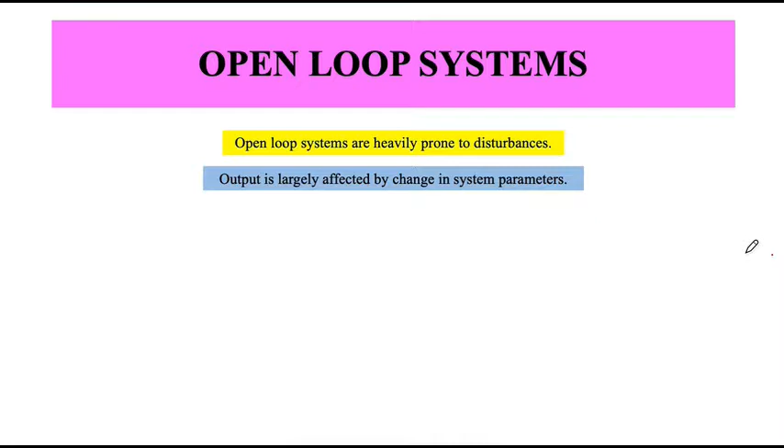Open loop systems are heavily prone to disturbances, right? So the output is affected by change in parameters. System parameters could be like, talking about a mechanical system, a mass could change, or any other thing in the system could change. It could also change because of external environmental conditions like temperature, sometimes disturbances act into the system, and I wouldn't know how to bring my system back to its original state.

For example, if I'm driving a car and my pedal is at a constant position, if I hit a ramp or an upslope, that is a disturbance, right? If I keep the same pedal position as I go through the ramp, I will not be able to maintain the desired speed, and after a while I might even lose speed and go to zero speed. So there is no automatic correction if I set my pedal to its open loop value and just don't change it when the disturbance comes.

So this is a block diagram for an open loop control system, where my disturbances affect my output.

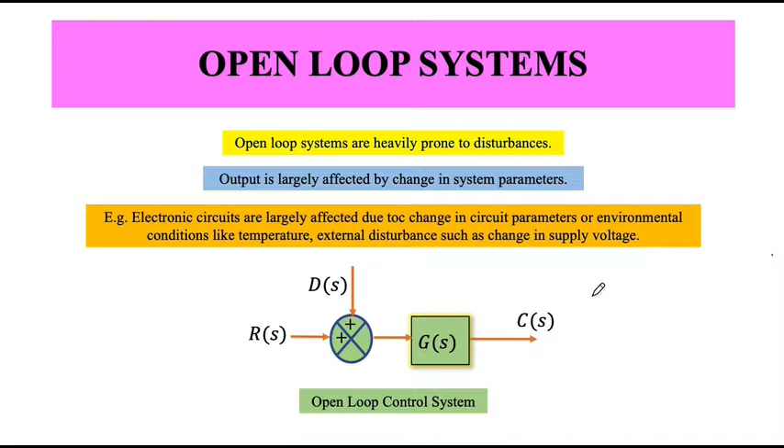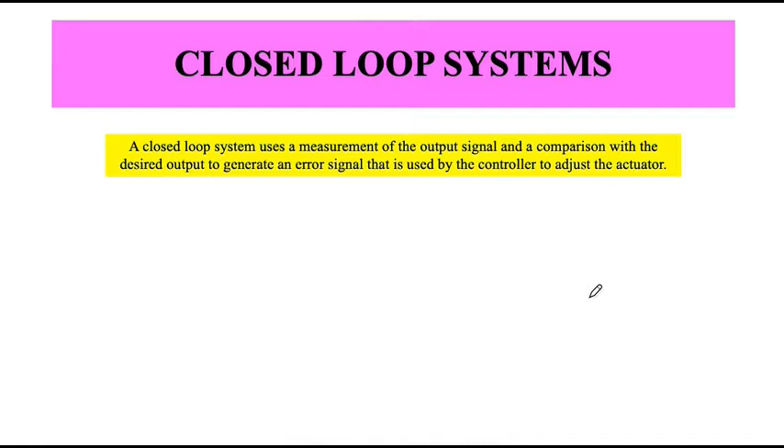In a closed loop system, the output is actually measured and compared with the reference signal, which generates an error signal. I update my control law, and through the control law I adjust my actuator, which gives the actual control input to the system.

So typical things that could happen are: you have the effect of disturbance, you also have measurement noise. My measuring device may not be very accurate, and it might come in a bit noisy. So how do we deal with these things, the disturbance signals and the measurement noise? We want to design our controller such that I reject disturbances, and I also reject the measurement noise.

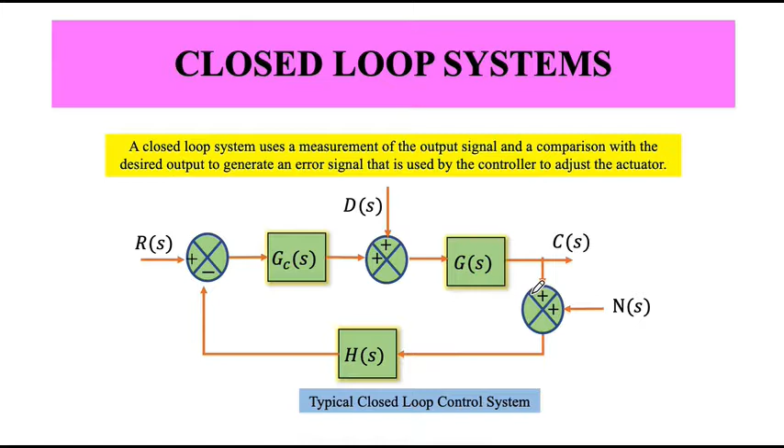Let's start with an example. This is a model for automatic control of speed for an automobile on a straight run. So I have a reference input, reference speed, and measured speed, and these generate an error signal which will decide the position of my throttle.

And this is my throttle, and there could be disturbances in terms of road slope, which could either be a positive slope or a negative slope. No disturbance just means no slope. This is a very simple model of my car. The car, which looks very big with lots of components, actually looks very small here. It's just a first order differential equation, a system with just one pole, and I get the desired speed. This is like a standard measuring device, like a tachometer, and it will convert into an appropriate speed.

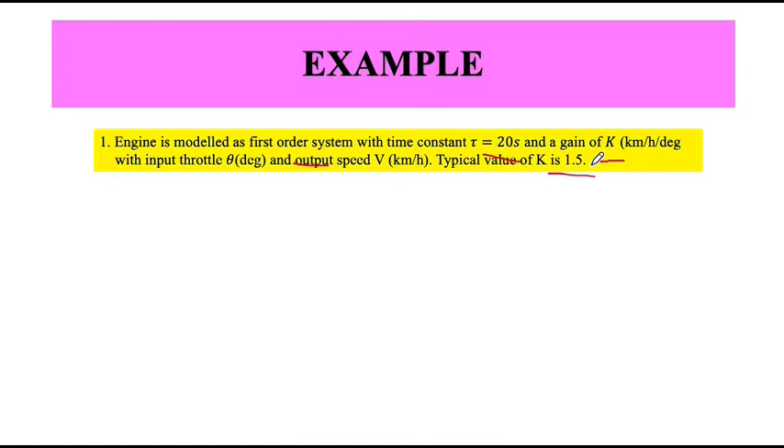The engine, for simplicity, is modeled as a first order system with time constant of 20 seconds and gain of k, which typically has a value of 1.5 here. The input is throttle angle measured in degrees, and the output is desired speed. The speed feedback is obtained by the tachometer, somewhere in the feedback loop, as we have seen in the diagram.

This is used to obtain the error signal for changing the throttle angle for the desired purpose. We say that the throttle angle has a time constant much less than the system time constant, and therefore we could ignore it. It's just modeled as a small gain of k1. So the error times k1 gives me the control input, and a typical value we could assume in this case is 50. Just see the diagram for that, it gives me the control input.

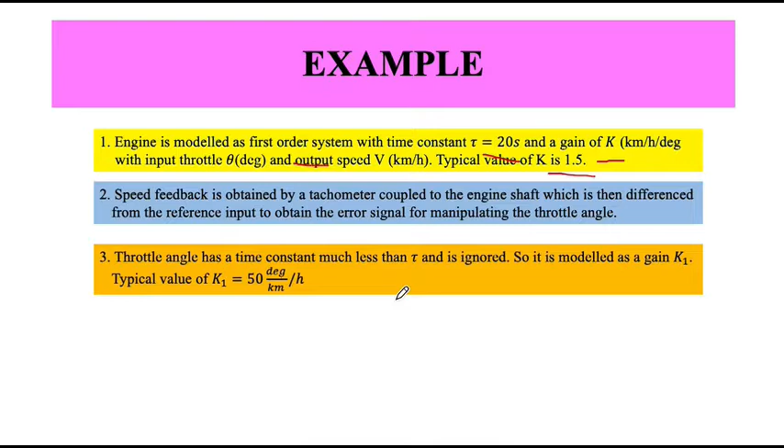The disturbance signal appears as the automobile runs up or down a slope. It is expressed in terms of percentage of road slope, and a 90 degree slope could actually mean you're hitting a wall, going vertically upward or downward. So this signal is converted into an equivalent throttle angle, and then you have this kg which takes care of the units, measured in degrees percentage per unit percentage of the slope.

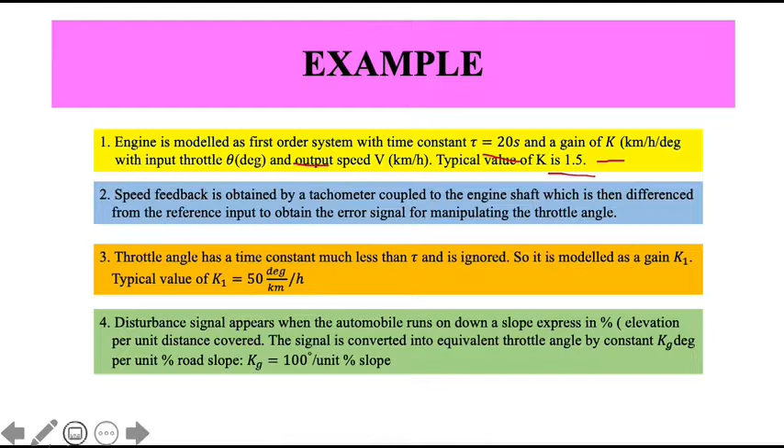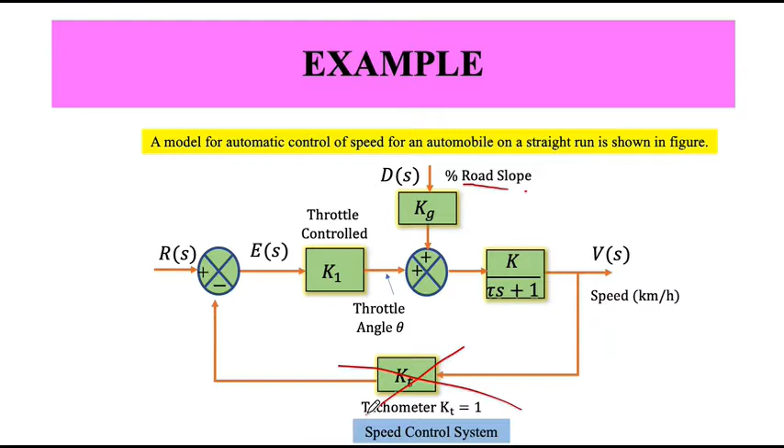So why are we doing this? Let's see in the diagram. What happens if we just do not measure this? We have a reference and an output, right? Suppose there is no feedback, and also take the case of feedback. What will happen in both cases, open loop as well as closed loop system? Let's see that.

Given the first condition of the problem, let the desired speed be 60 km per hour. That is vs is 60 km, or you can say vt from my diagram. Then we have to find r, the reference signal, with the system being first open loop and then closed loop. We will also see how the steady state error for step input changes.

So let's say in open loop system, at steady state my speed is 60. This is my open loop transfer function, this is input, this is my output. In open loop, steady state speed is 60, and my transfer function looks like this: k1 k over tau s plus 1, and rs. This will be my step signal.

So I have to determine the size of the step here. Let me just call it r by s. I am representing it with r by s because I have to find out the step signal. I will do the final value theorem, and then I get 60 equals k1 k r. As we have seen in the last slide, k1 is 50, k is 1.5. By putting in the values I can get the value of r, and r is 0.8 km per hour.

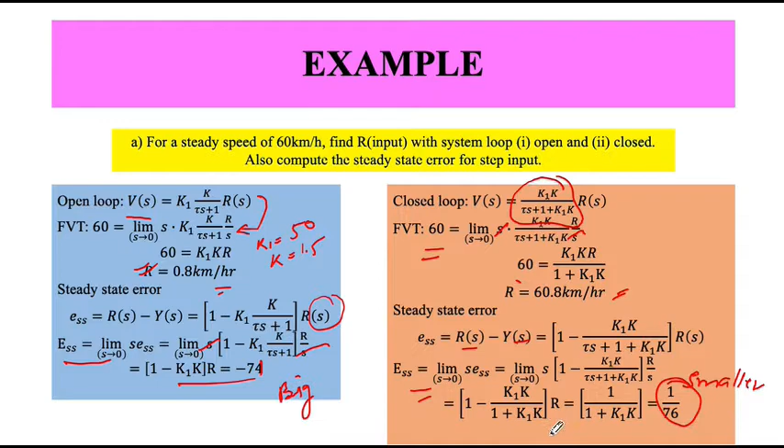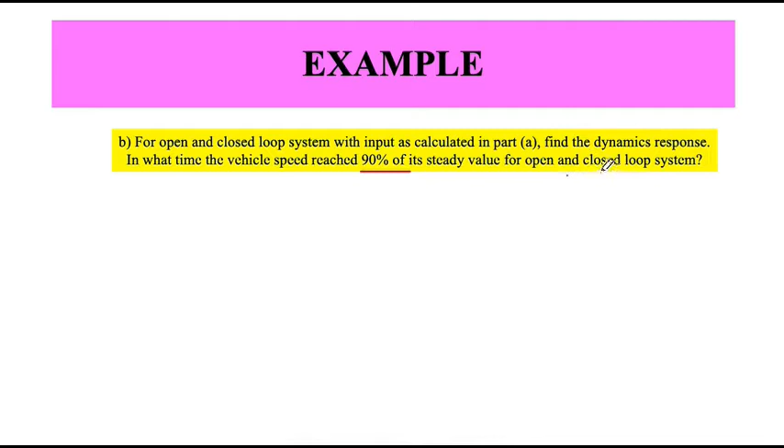Now in the next case, let's do some transient analysis. Earlier we did the steady state analysis. Now we want to find out at what time the vehicle reaches 90% of its steady state value for open as well as closed loop system. Let's do first for the open loop case.

In the time domain I can write directly vt equals 60 times 1 minus e to the power minus t1 by 20, considering time as t1. This is straightforward to write. Now my output is 90% of the steady state value, which is 60. So I want to find the time, let me call it t1, at which this occurs. I have an equation here with one unknown. I can easily compute t1 to be 46 seconds.

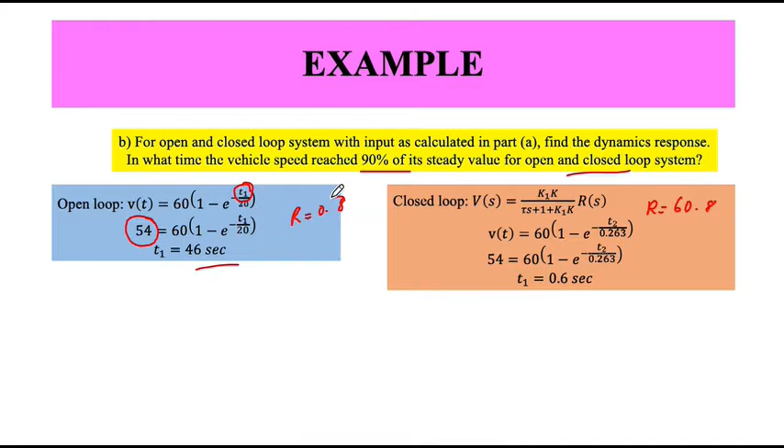So in case of rs for closed loop, it comes from what I computed earlier. It was r equals 60.8, and over here r was 0.8 kilometers per hour. So just be careful with that.

Now let me write down the final expression. Vt equals to, I'll skip the bulk of the computation. What I have is 60 times 1 minus e to the power minus t2 by 0.263. I just substitute these values and compute the inverse Laplace transform, and by now you know how to do these things. So about 90% could be 54, and then I compute the value of t2.

It actually turned out to be just 0.6 seconds. So this is open loop, this is closed loop, and you've seen it's about 77 times faster, right? So with a closed loop, my steady state error is much smaller, and also my response is pretty fast.

This will motivate us towards analyzing the effects of feedback on the system. So first we saw it happen in steady state response, and it also happens in transient. So is there anything else associated with feedback?

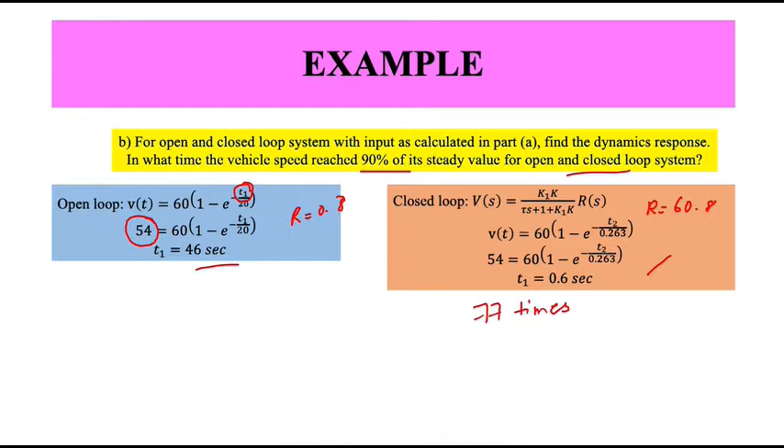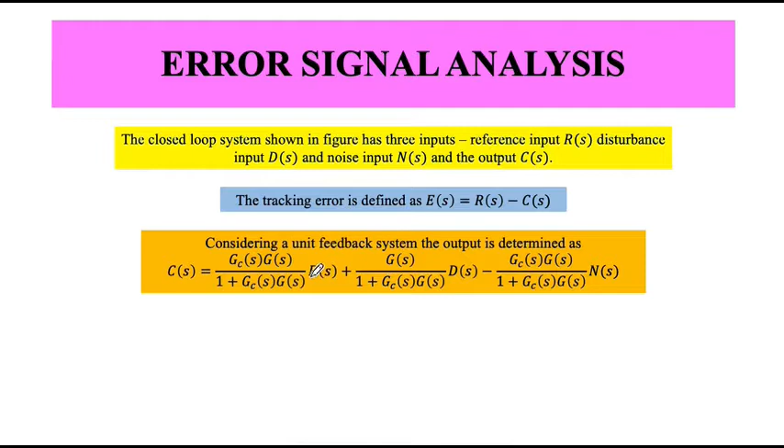In the initial block diagram, we mentioned a few other things in addition to reference and output: one was disturbance input and the other was noise input. In the presence of disturbance and noise, I can compute the overall output of the system as a sum of responses. First, compute the response by setting RS and considering DS and NS equal to 0. Then compute the response to disturbance by setting RS and NS equal to 0. Lastly, for noise, set the remaining two inputs to 0, and use superposition. So this gives the total response to the reference signal, to the disturbance, and to the noise.

Let us define the loop gain. Loop gain is GC into G. If you remember from the diagram, my forward loop was GC into G, where this is the controller and this is my plant. Now for the error, of course it's a function of the reference, the controller transfer function, and the plant transfer function.

Similarly for disturbance and noise, I can compute directly, and these are things we will discuss - how to compute the effect of disturbance in numericals - and then take the total response of the system as the sum of responses to the disturbances combined with the response to input.

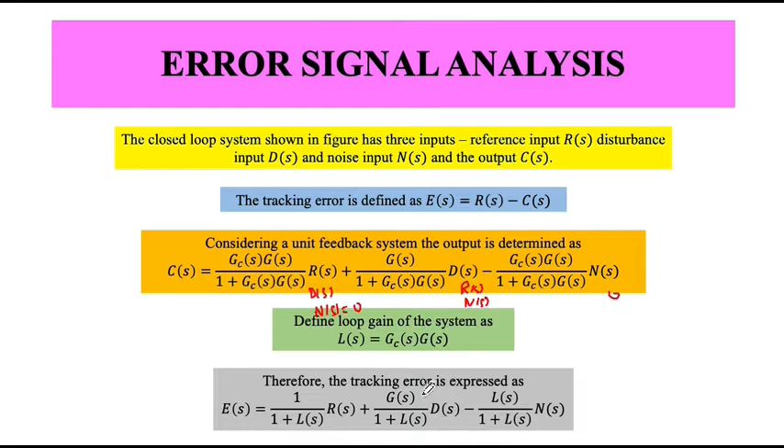Just superposition. So when we started the lecture, we said there could be some parameter variation, right? And then we'll see what is the effect of parameter variation on the system. So assume there is no disturbance or noise - we will come to this very shortly.

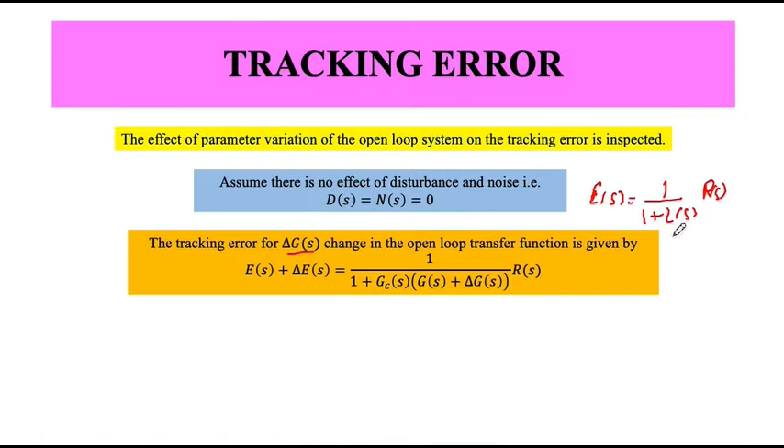Say my transfer function of the plant changes from G to G plus delta GS, and then the error signal changes accordingly. So ES, as I know, is 1 over 1 plus LS, times RS. And L is equal to GC and G, and G I now make GS plus delta GS. So this is how my error will look, by putting all these into this equation.

Now the change in tracking error can be computed. You just say what is delta ES - take this term ES, move it to the other side, and put in the values. ES is 1 over 1 plus LS, times RS. Then you get this expression, right?

This says if delta G is 0, then this term goes off. This is also what I have here - delta GS is the term, so that's the vital case to check. The change in tracking error is something like GCS, delta GS, and you have lots of terms of delta GS influencing the particular number.

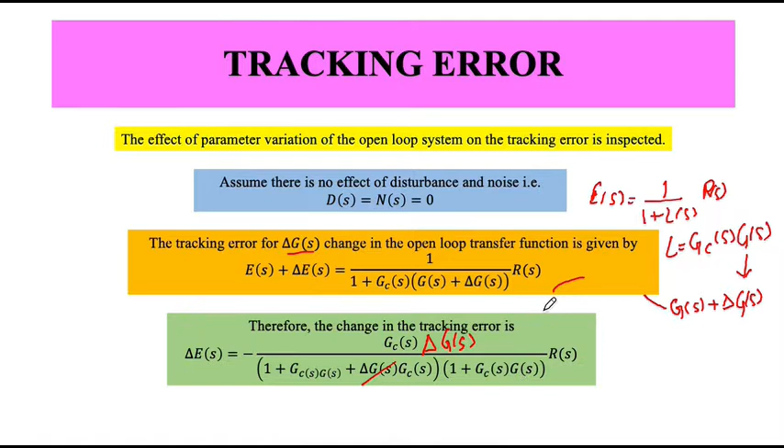So if I just take an open loop - if you remember, for convenience, let me draw it here - I'm having GC, I'm having G, then my output is CS, my input is RS. Now the error is usually, error will be RS minus CS, and in this case this is R.

So I will just omit the S for a moment. So C is GC GR, okay, and this is R minus, so E plus delta E equals R times 1 minus GC G plus delta G, okay. So delta E, since this is again an open loop, delta E equals minus GC delta GS. I'm just putting this E and then bringing it here. When you compute, you will get this value. So this is again an open loop.

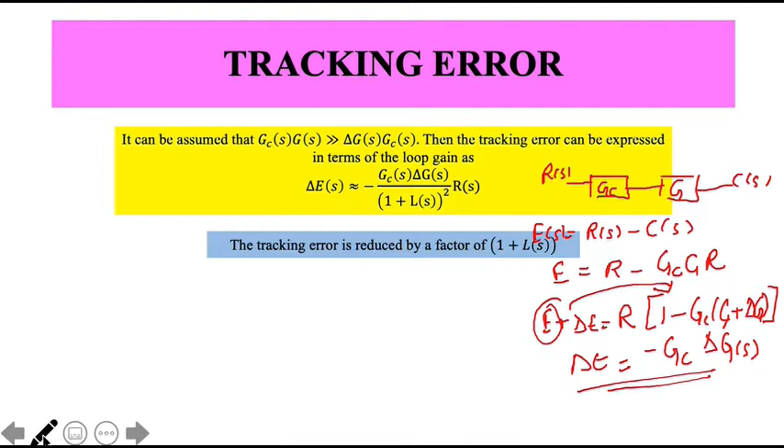Let us compare what will happen in closed loop. We derived this for closed loop in the last slide. I have an error signal, of course. So I do some approximation that GC into G is much larger than the very small change, and I can get an approximate expression like that. So this is change in error, delta E equals GCS delta G by 1 plus LS squared, RS. So if you compare this, you see that the tracking error is reduced by a factor of 1 plus LS. I will just erase the pen, okay. So my tracking error is reduced by 1 plus LS squared.

Or the square, and for large value of L I can just ignore this one, and just write LS. So delta E equals minus GC delta G. One is LS, another is also LS, and LS is GC into G, and it will get cancelled, and I will get this expression over here, okay.

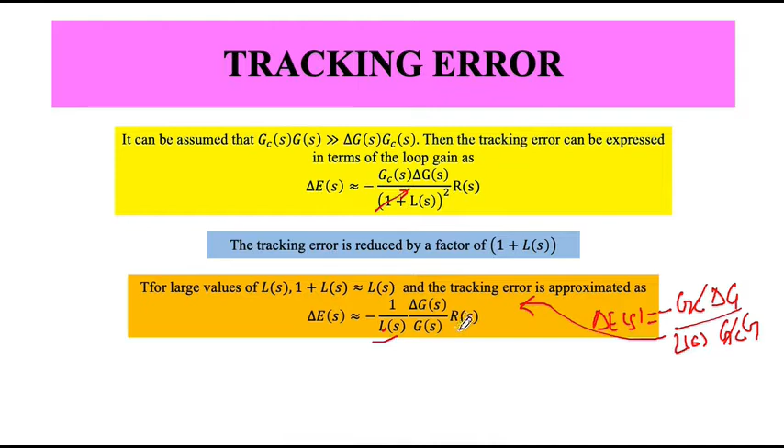So this is not difficult to obtain, right? So what does this mean? That the larger value of LS results in smaller change in tracking error, okay. Is there something which I could change in LS? Well, LS is, if you just recall, GC G. So there could be, well, you could now change the plant, but I really don't want to do that, right? Because the plant is already given to me. There is something which I am giving to control, and I just can't change the subject or the plant. So I can just manipulate my GC in such a way that it results in smaller change in tracking error. So this is about how feedback changes the error, or how it helps in reduction in error.

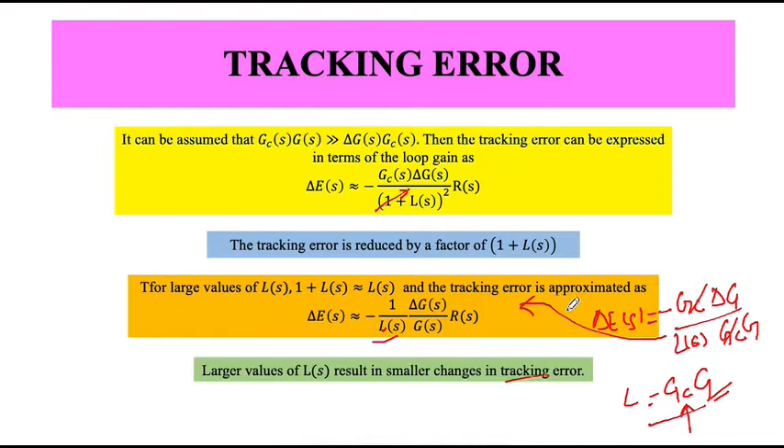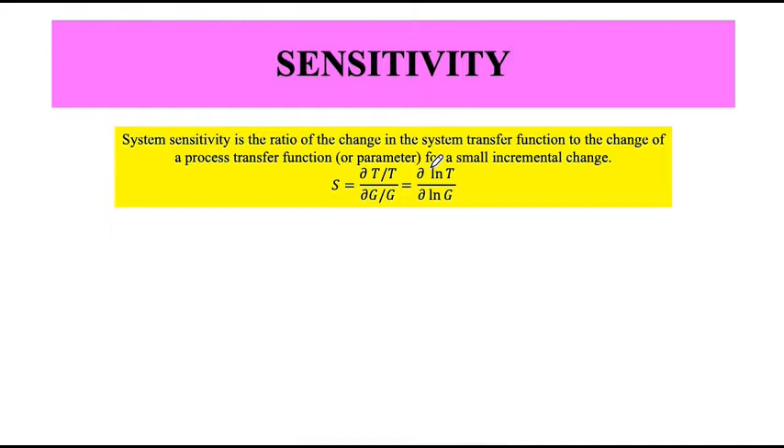So now what we saw was essentially this delta E relates to small change in system parameter. Now let's try to quantify that a little more, right? So we call this system sensitivity. We define this term as the ratio of change in transfer function to change in the parameter, some small parameter. So I have T as my transfer function. So let's just understand from here. I want to check how my overall transfer function changes with small change in G. So this is what I call sensitivity, this S, how sensitive the transfer function is to change in G. Okay, so SGT.

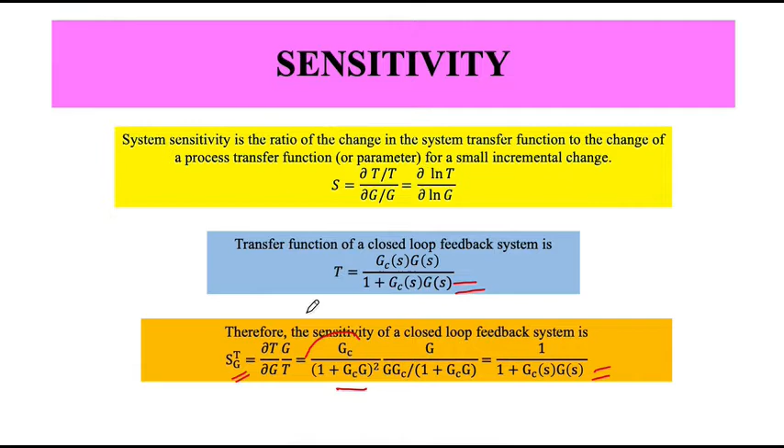Sensitivity of closed loop system, SGT, is the sensitivity in transfer function due to change in G. So T here, this is closed loop transfer function. I'm working with closed loop transfer function. I'm differentiating it with respect to G, and then I'm putting G by T. When I'm just calculating it, I will get this value. So how does it look like? Sensitivity of my transfer function with respect to G, or change in G, is simply 1 by 1 plus GCG. So here we are just finding sensitivity in transfer function with respect to my gain or process transfer function.

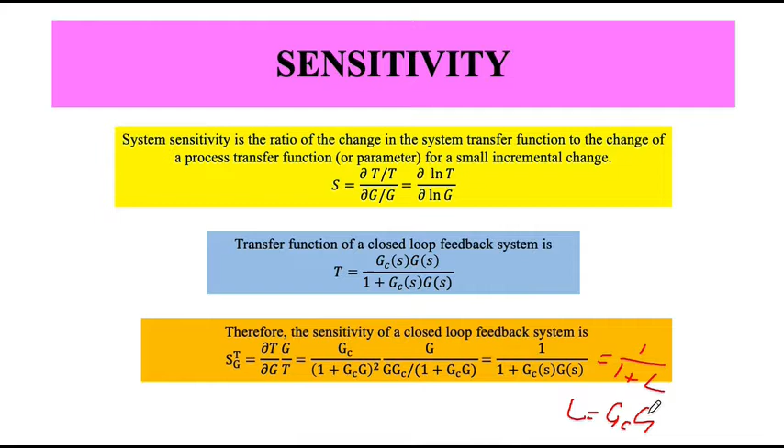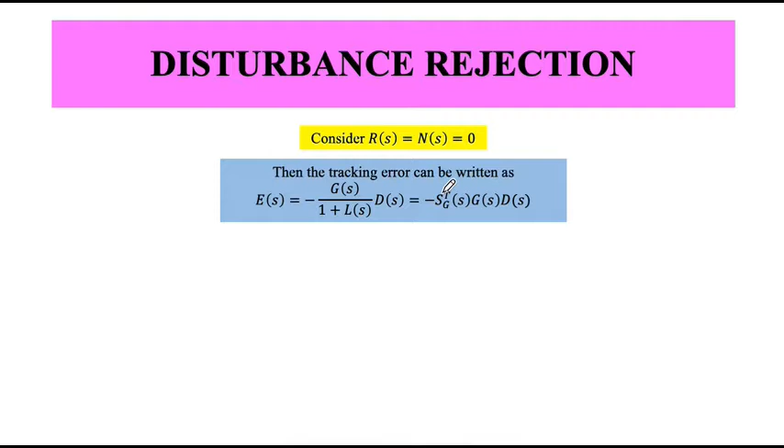And just start with, I'm just looking at sensitivity with respect to disturbance, right? So in this case I set reference and noise to be 0, and I compute the tracking error, right? So this is ES equals minus GS over 1 plus LS, DS. So if you were to write sensitivity in terms of LS, as before you write sensitivity in terms of L, it will be 1 over 1 plus L, because L is nothing else but GCG. So I'm just writing it in terms of L. So this is my error with respect to disturbance, and I take this term, right? So 1 by 1 plus LS is my sensitivity of transfer function with change in gain. Then GS and DS, right?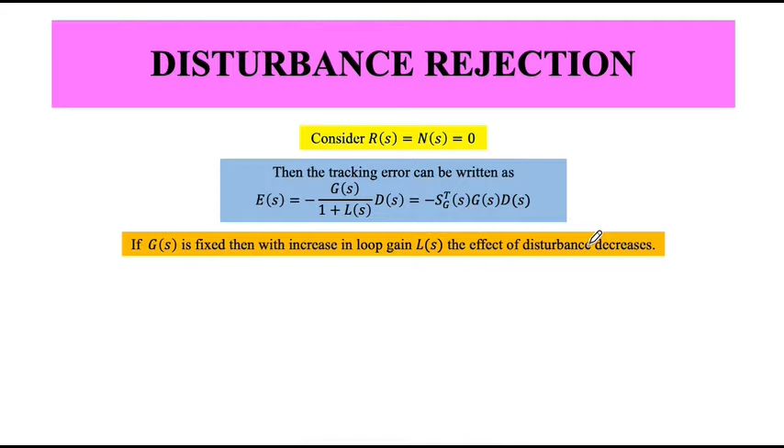So if GS is fixed, which is usually the case, then with increase in loop gain, I want to reduce the error, right? So typically my error should be 0, and if there are disturbances, there should be no error. So how do I... but then if I have a disturbance, I should expect that there is some error. So if there is some error, I would want to minimize the error, right? So GS is fixed, then with increase in loop gain, this guy will get affected, the disturbance can decrease, right? So something which I will briefly introduce now is, okay, A is something related to frequency.

We will talk more of this when we discuss frequency domain. Disturbance signals are typically signals of low frequency. It may be like a step, or even if there is oscillatory behavior in the disturbance, they will just be at very low frequency. In the car example, my disturbance is either I hit uphill or downhill, or something constant without any disturbance. So disturbance signals usually occur at low frequency.

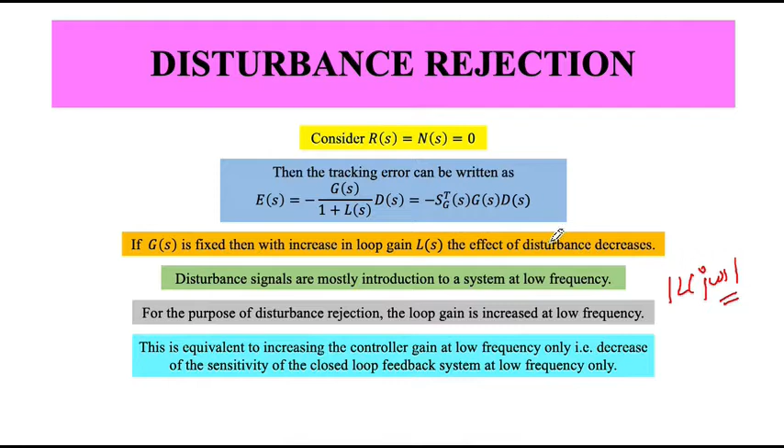Now what about the noise? We haven't talked about it so far, but usually my measurement comes with some noise. So error in terms of measurement is something like this. Again from the original expression obtained, LS by... is known as the complementary sensitivity function. Some people denote it as T, some people denote it as C. Since we have already used T and C, we will just call this S dash, the complementary sensitivity function.

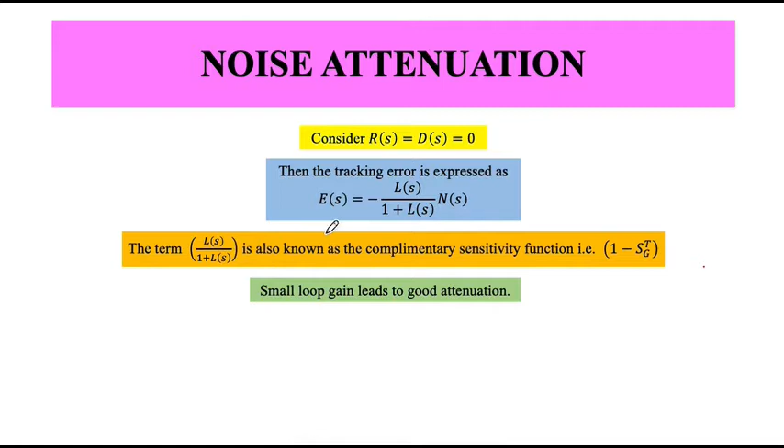If this loop gain LS is very small, it leads to good noise attenuation, because the effect of noise would be reduced, and typically noise signals occur at very high frequency when they get into the system. These signals are typically high frequency signals. So for the purpose of noise attenuation, the loop gain is tuned to be of low value at very high frequency. Previously, I wanted loop gain to be higher at low frequency to eliminate disturbance. For noise attenuation, the loop gain is tuned to have lower value at high frequency. So the controller gain is increased at low frequency for disturbance rejection and decreased at higher frequency for noise attenuation.

So it's like some kind of complementary effect here. These are two ways, based on what L is, that I can ideally deal with disturbance and noise together, reducing the effect of disturbance and measurement noise. We will do more of this when we cover frequency response, like what low frequency and high frequency actually mean, and how to compute these things. That we will keep for a little later when we do frequency response analysis.

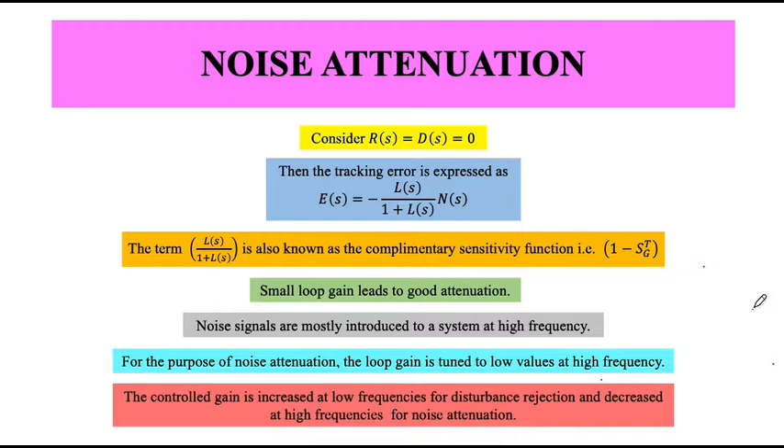Something we will use throughout from now on is what's called the characteristic equation. What is the characteristic equation? It's just a transfer function, and I look at its denominator. GS is the forward gain, HS is the negative feedback loop, the overall transfer function TS is G S over 1 plus GS HS. This is TS from RS to CS, where RS is my reference signal. So TS equals G by 1 plus GS HS.

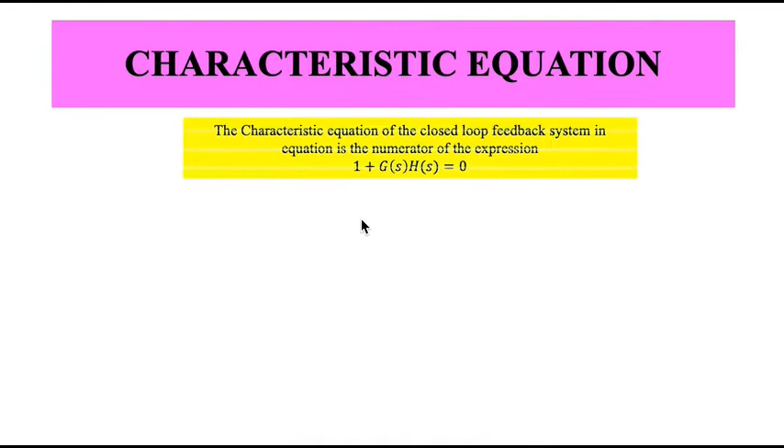So the characteristic equation is when I equate the denominator of this to equals zero. So 1 plus GS HS equals zero, and if HS equals 1, then I get something very simple: 1 plus GS equals zero.

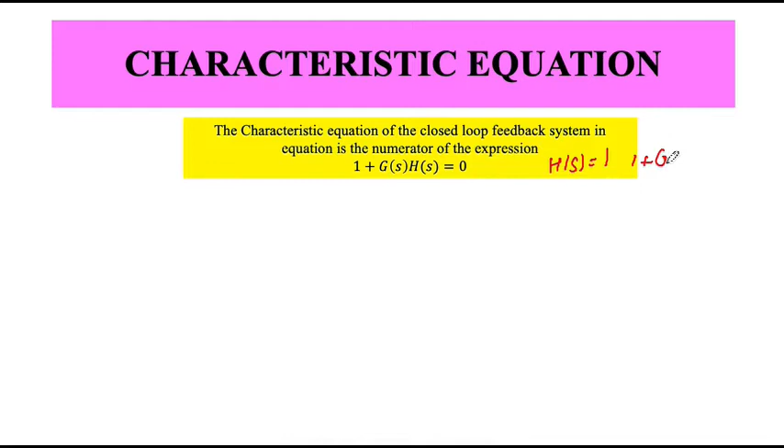Now if I assume the system with non-unity feedback, the assumed system was a non-unity feedback system. Is it possible that I do some magic and convert this to a system that looks like, let me call this G dash S, with a plus sign, a minus, and unity feedback, this is RS, and this is CS? So I just want to convert a non-unity system to a unity feedback system. Can I do this? The answer is yes. So what I do is compute or evaluate how the transfer function will look.

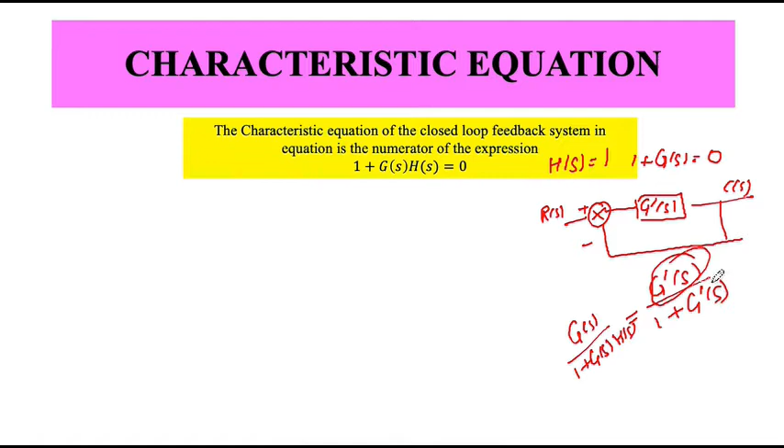Okay, so that will be g dash over 1 plus g dash, and then I find out what is g dash in terms of gs and 1 plus gs hs. This is when I am having non-unity feedback, this is when I am having unity feedback. So in terms of gs and hs, I will find out g dash h. So non-unity feedback system can transform into unity by just using this transformation. This should be very straightforward to compute because we are just dealing with a very easy looking linear equation.

So g dash s would be gs over 1 minus gs plus gs hs. Okay, h dash s is equal to 1, right? So while I do this, the characteristic equation remains the same. So if I just look at it, it is 1 plus g dash h dash s. So this is 1 plus g dash s, which is equal to 1 plus gs hs, right? So there's nothing special happening over here.

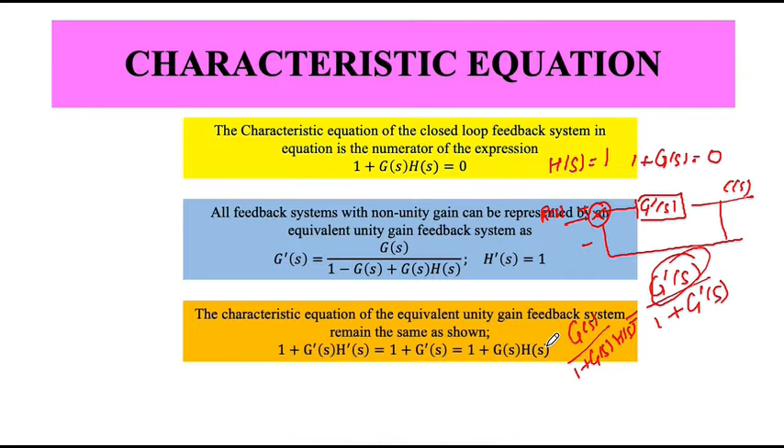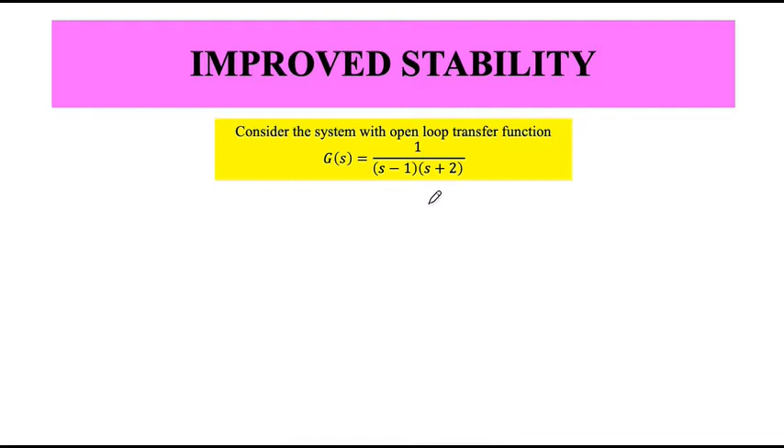So let's revisit stability for a while. I start with the system that looks like this. I know that this is unstable because there is one pole on the right hand plane. This is the pole which is on the right hand plane. Anything on the right hand side is unstable, right? So can I do something with this? Can I do something to make the system stable?

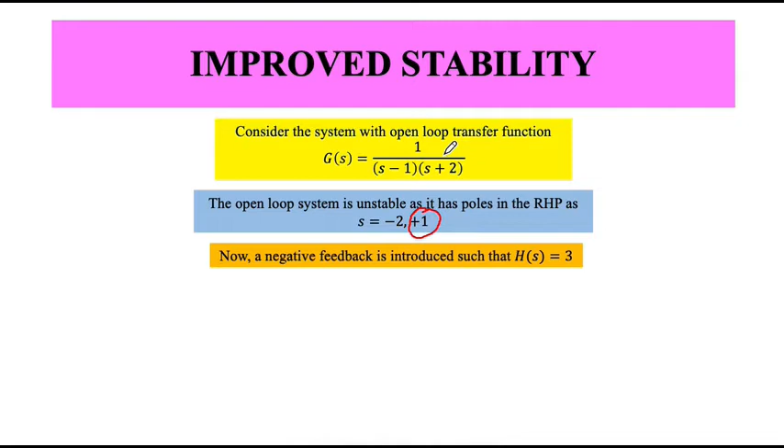Well, I just take negative feedback, H(s) is equal to 3, and I take the closed loop transfer function, set the characteristic equation equal to 0, and the poles of the closed loop system are now minus 1/2 plus minus j root 3/2, right? So these are complex conjugate poles, but which are again in LHP, in the left half plane.

So this guy, all the poles are in the left half plane, therefore the closed loop system is stable, right? So I start with an open loop system which is unstable, and I can stabilize it with just some feedback. So this is one advantage which I get when I do feedback - I can make an unstable system stable. Is it possible always, given any unstable system, that I can make it stable by feedback? Well, that may not always be possible, but in several cases it is possible.

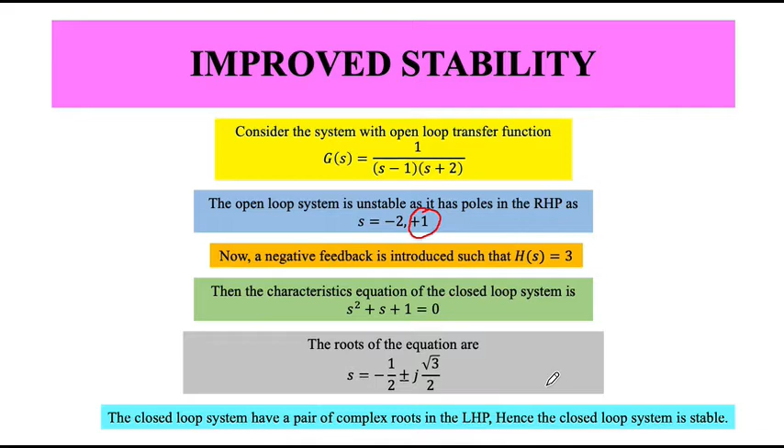So what are the advantages? The advantages are that I can have improved stability, I can deal with noise, and we could also increase bandwidth - we will see this when we do frequency response of the system. But then my overall gain of the system is reduced, because I have some multiplication factor over there, and so it gives some attenuation which may not always be desirable. So that's one of the drawbacks. Of course, I could have increased cost and sometimes a bit of complexity too. But of course, the advantages are a lot more compared to the disadvantages.

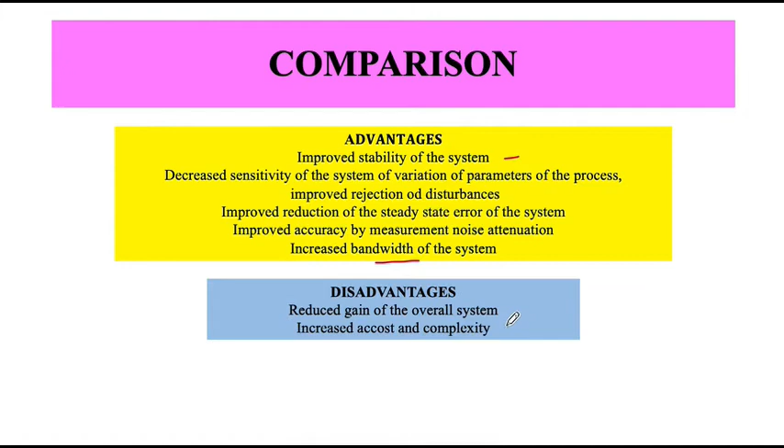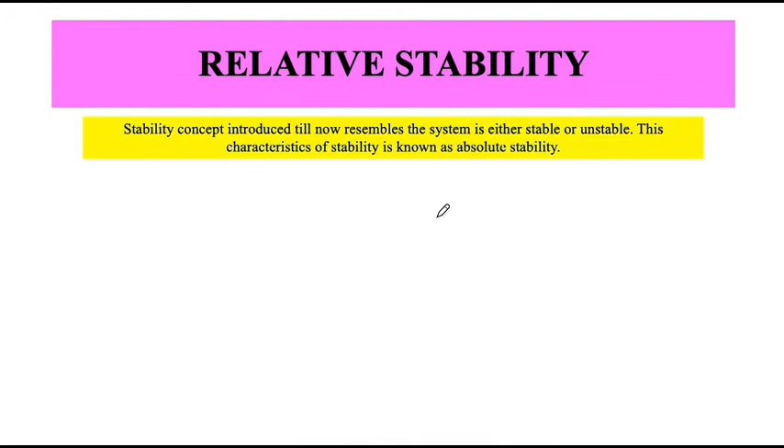So let's revisit stability for a while. I start with the system that looks like this. I know that this is unstable because there is one pole on the right hand plane. This is the pole which is on the right hand plane. Anything on the right hand side is unstable, right? So can I do something with this? Can I do something to make the system stable?

Well, I just take negative feedback H(s) is equal to 3, and I take the closed loop transfer function, set the characteristic equation equal to 0, and the poles of the closed loop system are now minus 1/2 plus minus j root 3/2, right? So these are complex conjugate poles, but which are again in LHP, left half plane. So this guy, all the poles are in the left half plane, therefore the closed loop system is stable, right?

So I start with an open loop system which is unstable. I can stabilize it with just some feedback, right? So this is one advantage which I get when I do feedback - I can make an unstable system stable. Is it possible always, given any unstable system, that I can make it stable by feedback? Well, that may not always be possible, but in several cases it is possible.

We will see this when we do frequency response of the system. But then my overall gain of the system reduced, right? Because I have some multiplication factor over there, and so I kind of give you some attenuation which may not always be desirable.

So that's one of the drawbacks. Of course, I could have increased the cost to deal with it, cost and sometimes a bit of complexity too. But of course, the advantages are a lot more compared to the disadvantage.

So sometimes now we have seen how the system should be sensitive to change in parameters, right? So we will see, does that have any effect on stability? That is called relative stability.

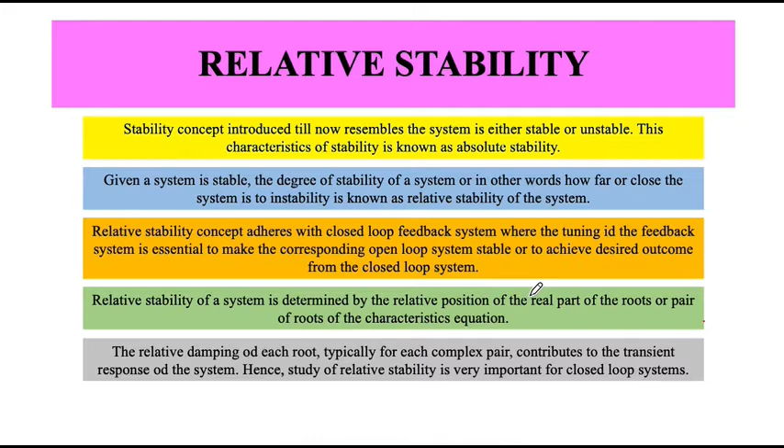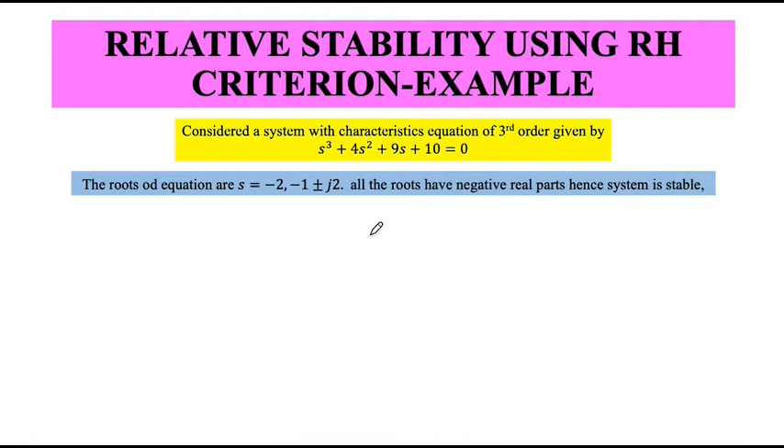So sometimes we have seen how the system could be sensitive to change in parameter, right? So we will see, does that have an effect on stability, and that is called relative stability. So at a moment we just talk about, is the system stable or unstable, right? Nothing more. So how can a given system be defined in terms of some kind of relative stability?

Relative stability means a small change in parameter of the system makes it unstable, right? Then there will be also some kind of measure of stability, that if my system parameters are between so and so, I could still be stable, right?

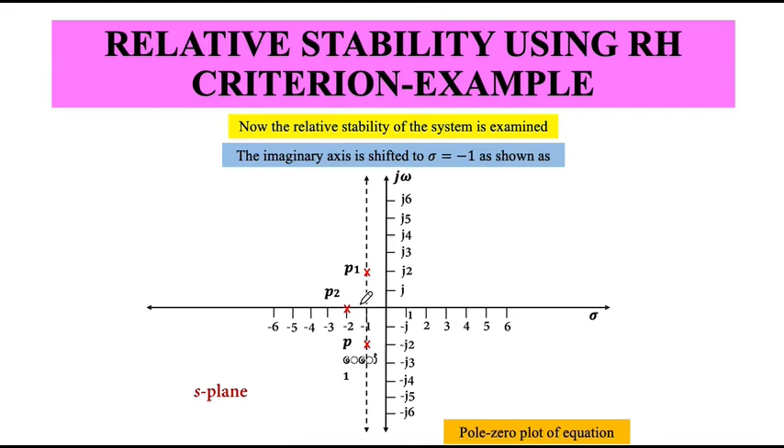For example, if I'm cooking food and I download something from khana.com and all those websites, they say 1 tablespoon of salt. But if I put one tablespoon plus or minus 1%, it does not really kill the taste, right? But if I put 2 tablespoons, that might be awful. If I put 0 tablespoons, that may still not be very good. So there is some amount of relative stability, right? You can go slightly higher, slightly lower, and still maintain stability in terms of taste.

But if I'm making tandoori chicken and it says put it in the oven for 20 minutes, but if I say 22 minutes, then I might not really get something very edible, right? So that's where things could be unstable. Okay, 20 minutes plus 1 second could be okay, but if I do 20 minutes plus 2 or more minutes, that could give me something very strange, right?

So these are the things where change in little parameters sometimes affect stability, could affect stability. So if I'm playing a cricket match, my team is chasing a score for some 20 overs, and at the end of 15 overs I still need 40 runs with 5 wickets in hand, I could still say I can win the game, right?

Because my required rate is not too much, but all of a sudden if I lose 2 wickets, right, then that would be a recipe for disaster. I could go from a winning zone directly to a losing zone, right? So these are the things where you are stable, and all of a sudden unstable, and that is exactly what is the concept of relative stability.

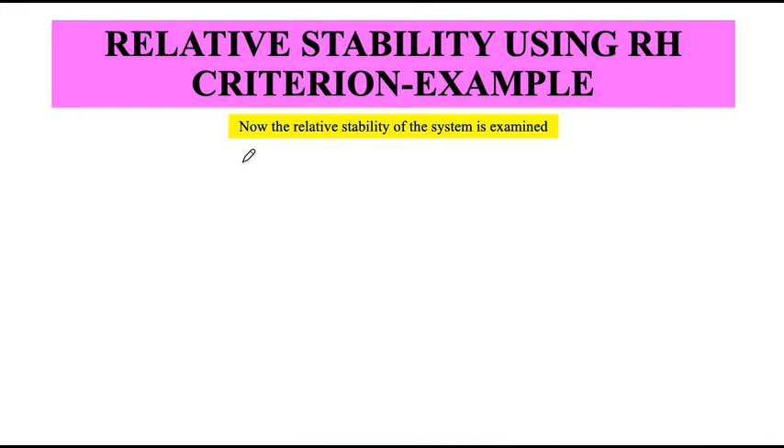So we don't really deal with food or sports here, we deal with physical systems. So what does it mean in our case, right? We look at our stability in terms of location of poles, right? Typical complex or real poles or whatever, right?

So what I said in terms of system, if I say, well, I am here, so there are my poles, and I have a system which typically could look like K, G, H, here it is, plus, minus, R, C, the output. And I had designed my system. I worked very hard. I say, well, my system is stable, it has poles at

minus 0.1. Okay, so I give a fascinating design problem, and I just say this, my poles are at minus 0.1 plus minus j, somewhat 2j, and I work very hard. I submit this as my thesis, and I say my controller works because my poles are here, right? So these are my poles. Two days later, my supervisor comes and checks it.

Something could have gone wrong. My mass would have been a little different than earlier. Some rats might have chewed on something where my mass slightly decreases, and when I run the system again, maybe these poles just jump here, right? Or maybe I did it in an air-conditioned environment, the power goes off, and I'm presenting to my examiner or supervisor in a different environment where the parameter might change and say, oh, what I see, the response has gone unstable, right? So my poles could just be, instead of minus 0.1, become positive.

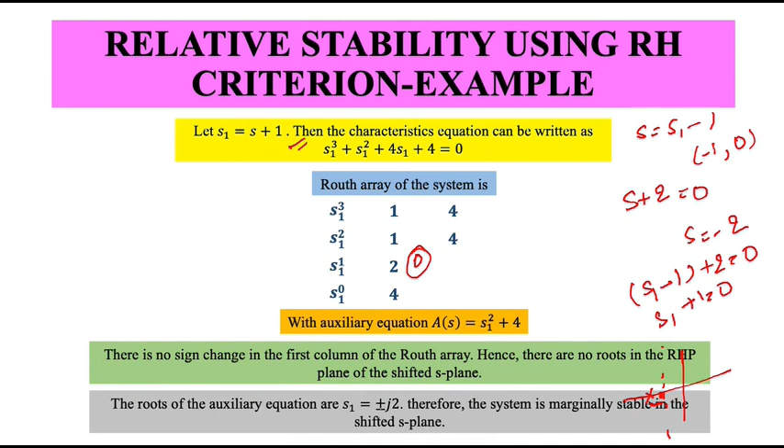This could happen, right? So well, there are lots of cases where this happens, and when I design things, I will see, well, I don't just want stability, I want more stability, right? So I want my poles to be somewhere here, just left of 0, but say minus 1.